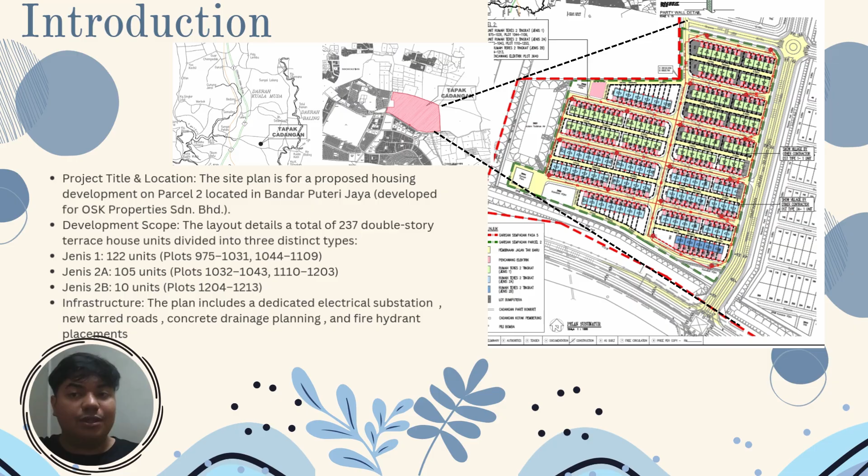And the infrastructure for this plan includes detailed electrical infrastructure, an electrical substation, new tarred roads, concrete drainage planning, and fire hydrant placements.

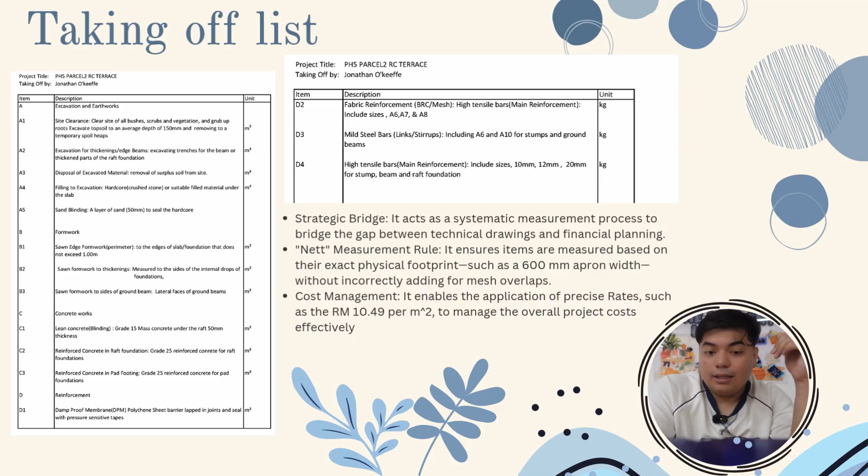Today we'll be talking about our mini project and what we will be doing today. So what we'll be doing today is the taking off list. As you can see, this is our taking off list. To be clear, this taking off list acts as a systematic measurement process to bridge the gap between technical drawings and financial planning. The net measurement rule ensures items are measured based on their exact physical footprint, such as a 600 mm apron width, without incorrectly adding for mesh overlaps.

And the cost management enables the application of precise rates such as RM10.49 per meter square to manage the overall project costs effectively. So in other words, this is basically the start for our project. Whenever we start a project, we start with the mini project for the taking off list.

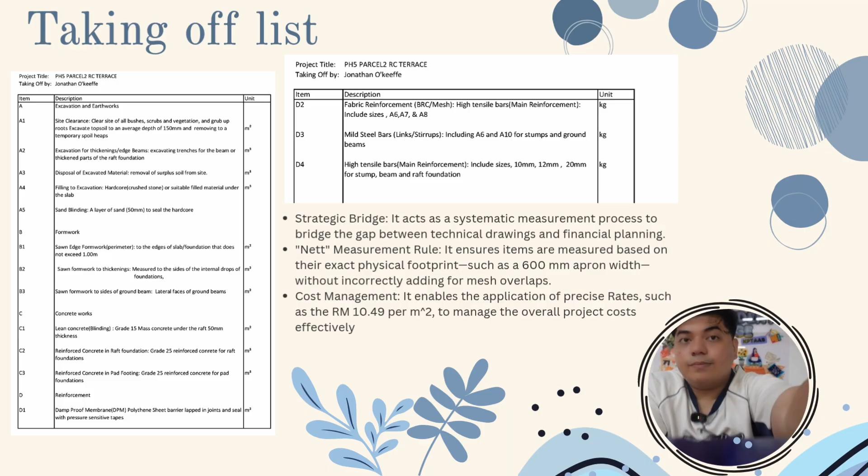Today I would like to talk about the general clearance. This section of the report covers the general clearance and initial site preparation for the project as referenced in drawing PR2/DST-T1/FP/01. The scope of work involved clearing the site of all bushes, scrubs and vegetation, including grubbing up roots. Additionally, it includes the excavation of topsoil to an average depth of 150 mm, with the excavated material being removed to temporary spoil heaps for future use or disposal.

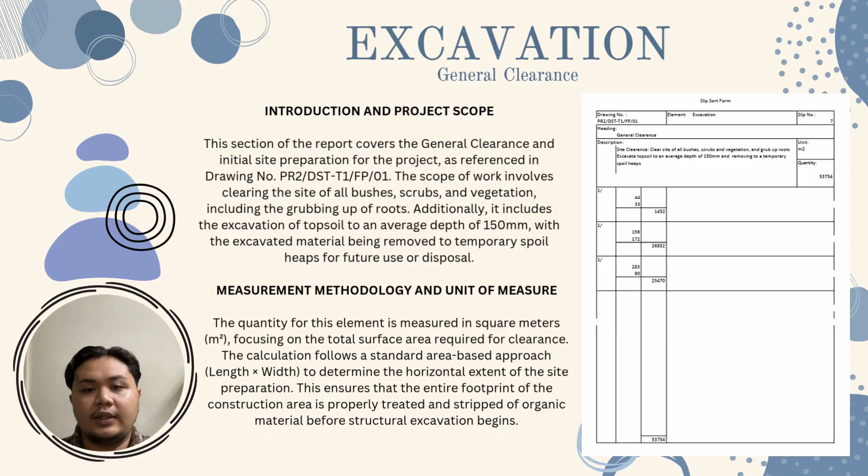Next is measurement methodology and unit of measure. The quantity for this element is measured in square meters, focusing on the total surface area required for clearance. The calculation follows a standard area-based approach, length times width, to determine the horizontal extent of the site preparation. This ensures that the entire footprint of the construction area is properly treated and stripped of organic material before structural excavation begins.

Next, we talk about the excavation for trenches, raft foundation and ground floor slab. Introduction and project scope. This report details the quantity take off for excavation works, specifically for trenches associated with the raft foundation and ground floor slab. The works follow the specification outlined in drawing number PR2/DST-T1/FP/01 and are officially documented under slip sort number 6. The primary objective of the excavation is to prepare the trenches for edge beams and thickened sections of the raft foundation to ensure structural integrity.

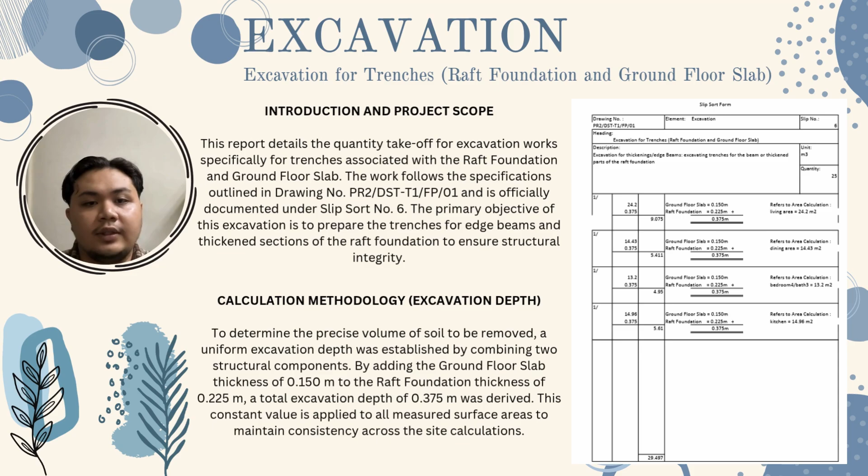Next is calculation methodology for excavation depth. To determine the precise volume of soil to be removed, a uniform excavation depth was established by combining two structural components. By adding the ground floor slab thickness of 0.150 meter to the raft foundation thickness of 0.225 meter, a total excavation depth of 0.375 meter was derived. This constant value is applied to all measured surface areas to maintain consistency across the site calculation.

The last one is about the excavation for pits, stump and pad footing. The introduction and project scope. This phase of excavation focuses on the preparation for the pits, specifically for the stump and pad footing requirements as per drawing number PR2/DST-T1/FP/01. The scope involves the excavation for thickened edge beams and trenches required for the raft foundation. This process is essential to create the necessary structural recesses that will house the main support footings of the building, ensuring a stable transition between the ground and the primary structure.

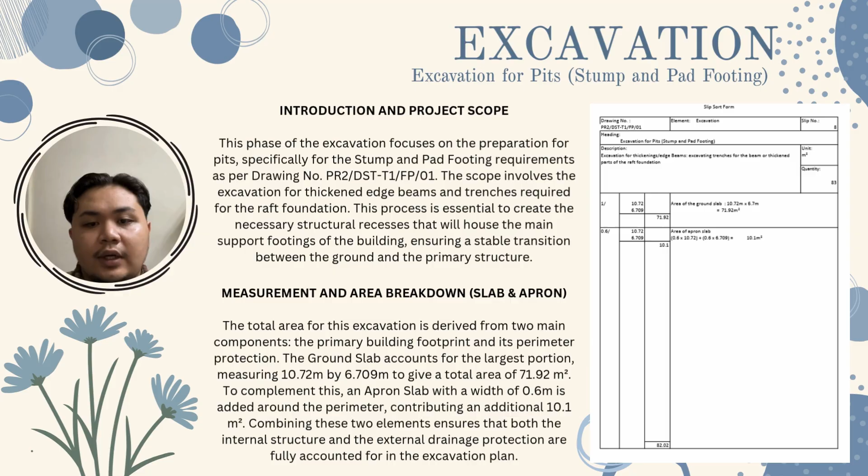Next is measurement and area breakdown for slab and apron. The total area for this excavation is derived from two main components: the primary building footprint and its perimeter protection. The ground slab accounts for the largest portion, measuring 10.72 meter by 6.709 meter to give a total area of 71.92 meter square. To complement this, an apron slab with a width of 0.6 meter is added around the perimeter, contributing an additional 10.1 meter square. Combining these two elements ensures that both the internal structure and the external drainage protection are fully accounted for in the excavation plan.

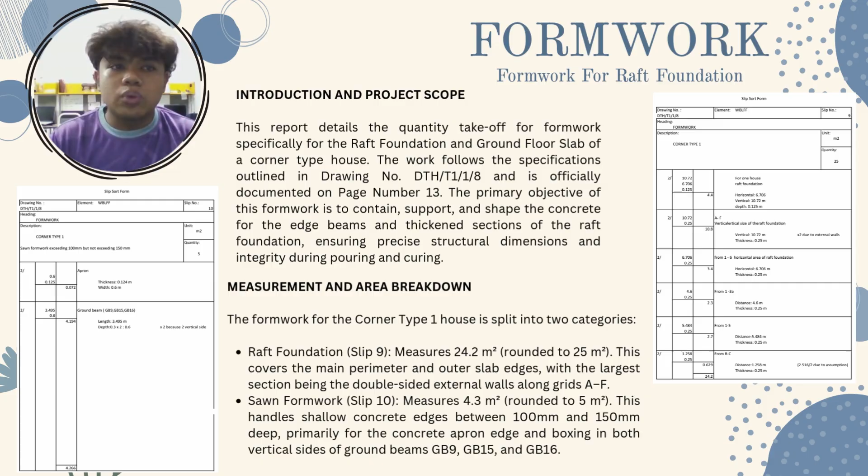Now we go on to the measured items, which is the reinforcement. So my part for this reinforcement focuses on high tensile steel bar reinforcement, which is our main reinforcement for our buildings, used primarily for stumps, ground beams and raft foundation.

The calculation for this is the cutting length, taken as the total length of the element, deducting the concrete cover, typically 0.04 meters per side, so 0.08 meters total, and we add the two bends times 5.5D, and the laps, maybe about 40 diameters.

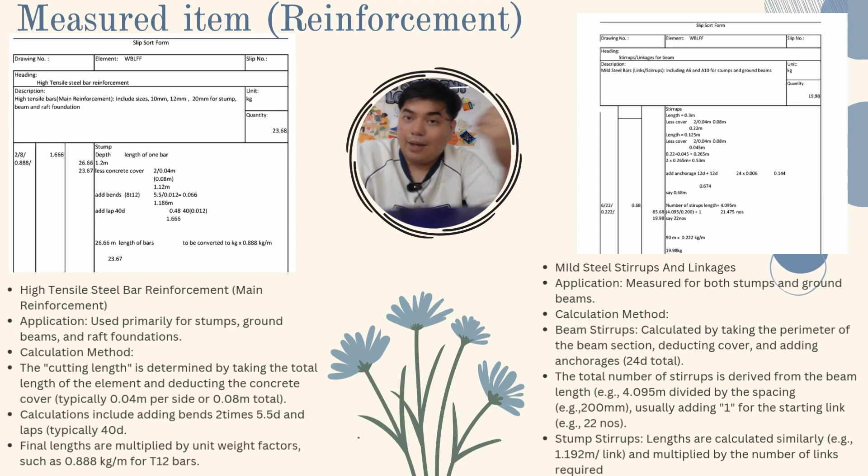D is diameter. Okay, then the final length is multiplied by unit weight factors such as 0.888 kg per meter for T12 bars. And we also use the same method for mild steel, which is mostly used for stirrups and links.

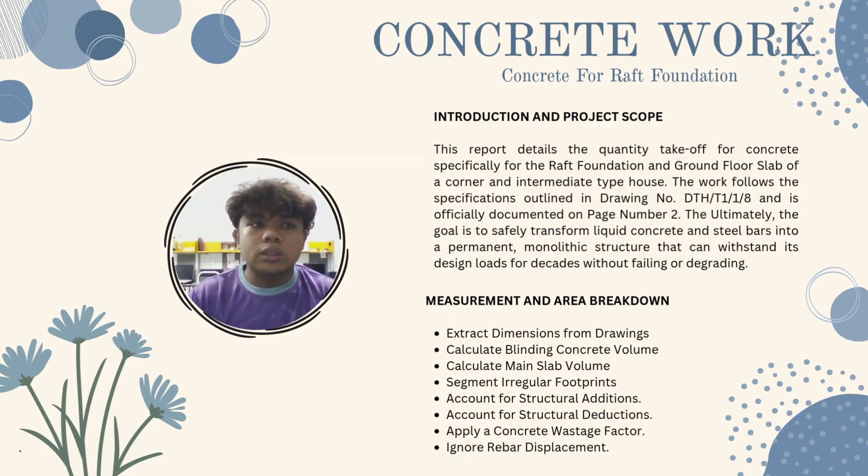In our group comprehensive project analysis for Yarra Park, we have worked through the initial measurement schedule and the systematic build-up of the bill of quantities. My core responsibility in this presentation is to dive into the commercial engineering phase, specifically the first principle build-up rate analysis for our primary structural elements. I will detail how we translate raw data into our final competitive tender rate for terrace types 1, 2A and 2B.

To establish an analytical baseline, our rate in this study is broken down into three raw cost components: material inclusive of wastage, labour constants, and mechanical plant operation costs, subsequently compounded with a standard 15% overhead and profit.

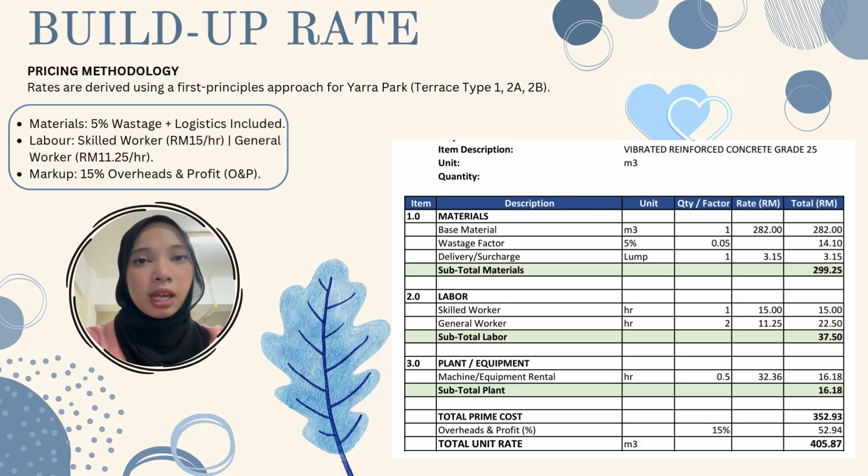Our total prime cost is 352 ringgit and 93 cents. Compounding this with our 15% corporate markup, our final strategic unit rate is 405 ringgit and 87 cents per cubic meter.

Okay, moving over to the steel reinforced element, our project model analyzes both high tensile bar and mild steel reinforcement per kilogram. In the market context of this project, both steel configurations share an identical commercial base cost of 3 ringgit and 15 cents per kilogram, paired with a standard 5% cutting and bending wastage value.

From a labor productivity standpoint, our analysis utilized a skill level constant of 0.012 hours per kilogram for fixing and 0.010 hours for general handling. Now, if we convert this number mathematically into time, 0.012 hours translates roughly to 43 seconds per kilogram, while 0.010 hours is exactly 36 seconds per kilogram.

On paper, 43 seconds sounds impossibly fast to cut, bend and fix a rebar. However, as a critical analysis, this reflects productivity at the construction site. Workers do not process rebar one by one. They utilize mechanical bar cutters and benders to process dozens of heavy steel bars simultaneously.

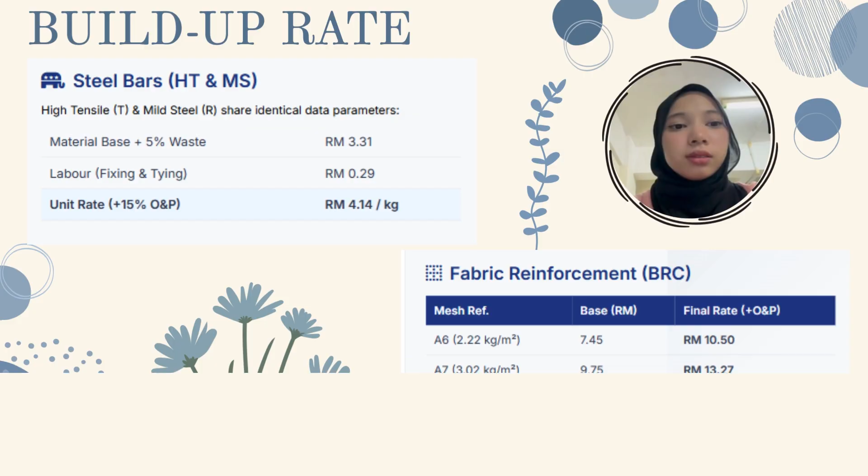Our final structural element is formwork. Formwork construction is inherently a labor-dominant task, and our analysis highlights a very important trend. While the base material cost for the timber framing and boarding is calculated at RM13.33 per square meter, look closely at the labor matrix. Its demanding carpentry installation consists of 0.80 hours of skilled trade work, coupled with 1.03 hours of general labor for striking, oiling and clearing.

If we convert this, it takes a carpenter about 48 minutes to set up, and a general worker about 1 hour and 2 minutes to strike and clear 1 square meter of formwork. This drives our subtotal labor cost up to RM23.59, making labor the single largest cost driver in the rate build-up, accounting for more than 50% of the prime cost. With our 15% overhead and profit levy applied, the final commercial rate is set at RM44.37 per square meter.